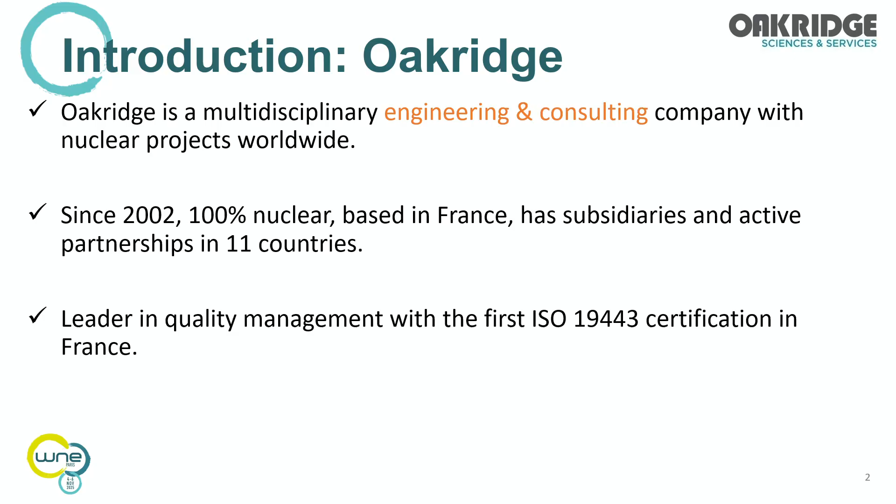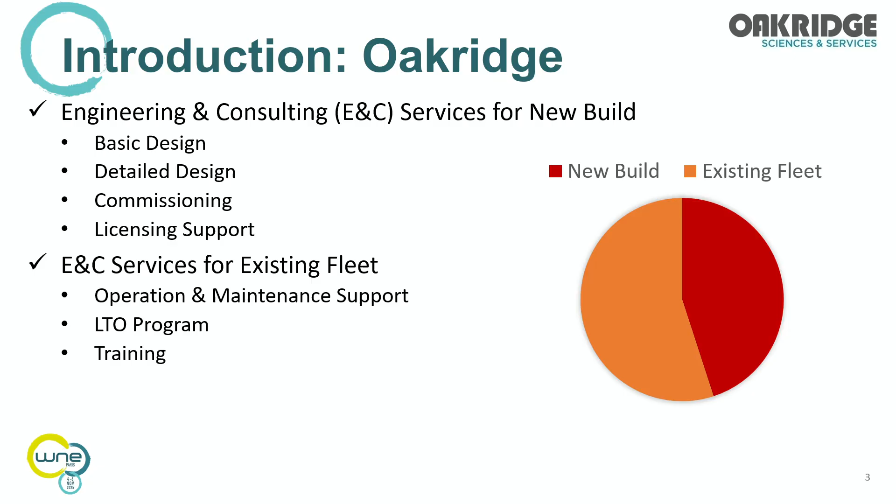Our projects are largely divided into new build and existing fleet. For new build, we do the basic design, detailed design and commissioning, and the subsequent license support to continue operation of the new build. For the existing fleet, we do O&M support, lifetime extension programs, and also training of the workforce to continue operating in a safe and efficient manner.

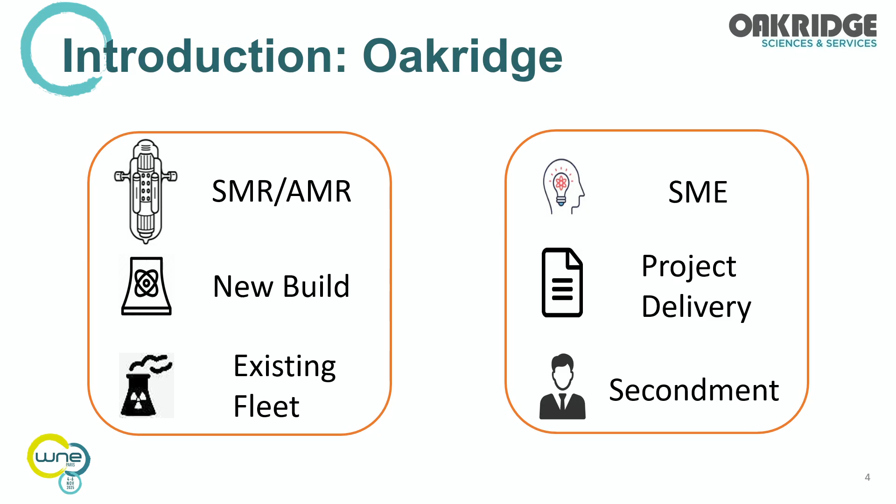When you look into the project portfolio, in new build we can separate into SMR and advanced modular reactor development. This portion came into play about 3 or 4 years ago, before I came on board to Oakridge.

This gives me an opportunity to showcase what we have done and what we'd like to do with these SMR developers across Europe and hopefully around the world.

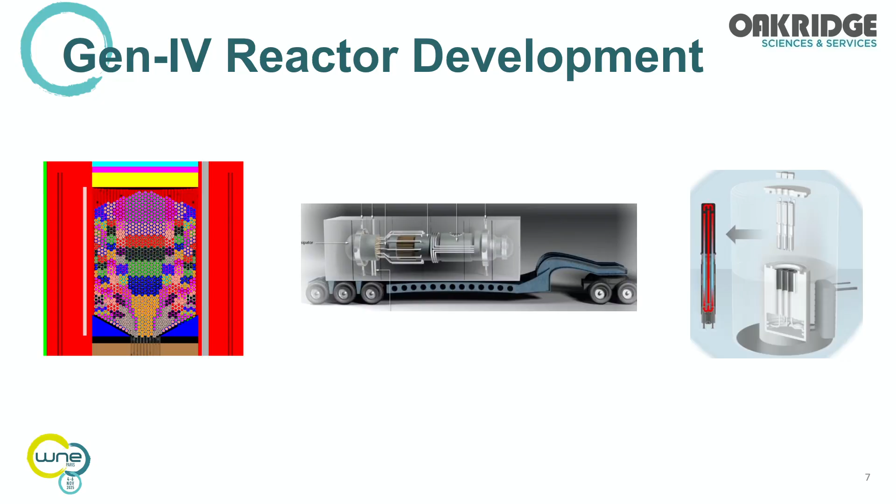We work a lot with SMR developers, but obviously I cannot use their confidential information. So for this presentation, to showcase our capability, I simulated a prototype called Oak-1, our Oakridge prototype reactor. That's a thermal molten salt reactor that is transportable in a truck bed.

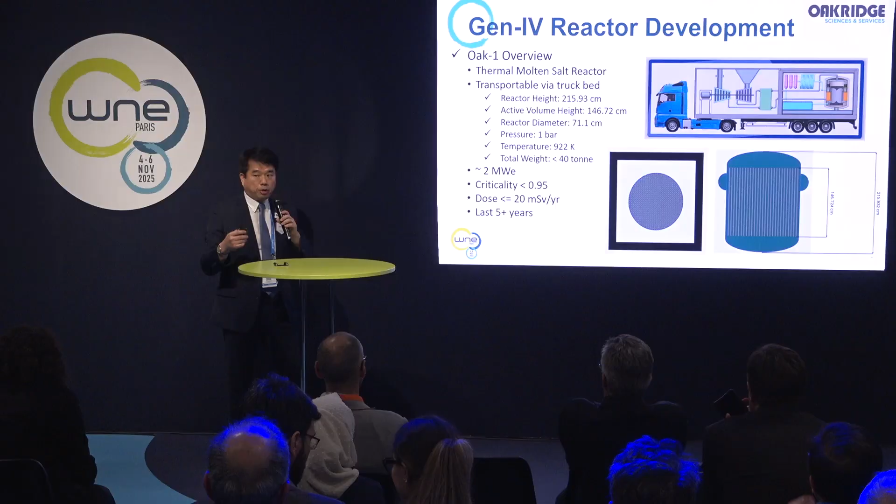The reactor is approximately 2 meters tall with an active height of about 1.5 meters. The reactor diameter is about 70 centimeters. Pressure is operating at 1 bar with molten salt reactor fuel, and temperature running at 920 Kelvin, with hopefully the total weight minimized to about 40 tons.

However, if you work with a microreactor at all, you'll realize temperature management and weight management are very critical issues. Even if you get your reactor working neutronically, you really have to get down to the weight and heat management in order for the reactor to operate properly.

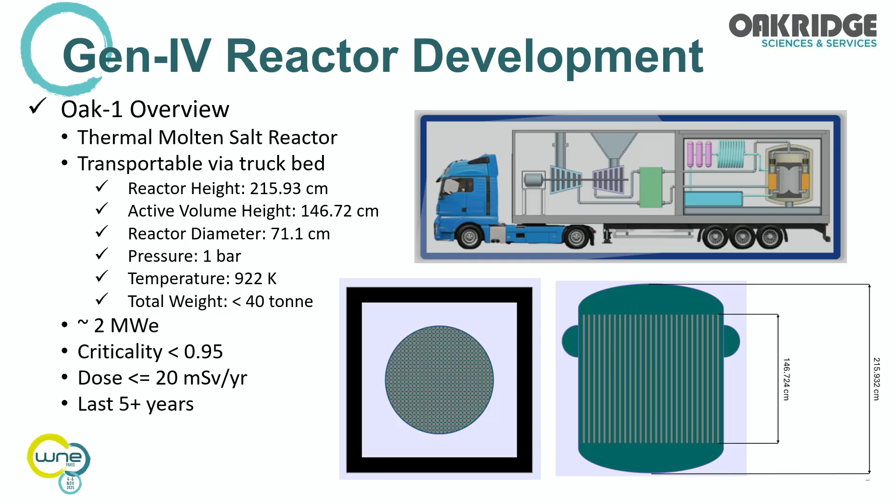So we are shooting for 2 megawatts of electricity, maintaining criticality below 0.95. Hopefully the dose during transportation will be minimized to 20 millisievert per year, and we are looking at a nuclear fuel cycle of about 5 years. That's the basic design goal we have in mind when trying to create this prototype reactor that can be on the road.

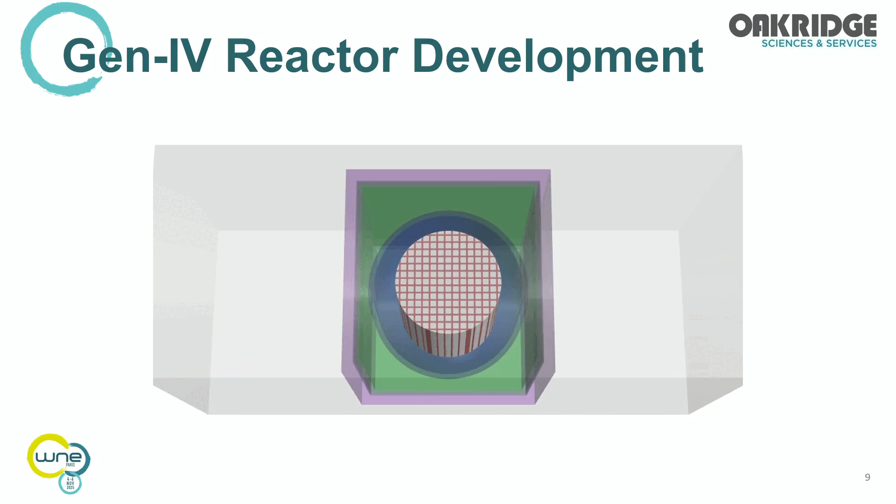So here is a rough picture, a movie of the reactor type we developed. You can imagine the inside of a container, with the core, the basic reflector, and the moderator built in there. And of course you have to have the primary loop and all the shielding and cooling materials involved. This will come out in more elaborate detail when we are done with the design.

When you use the criticality calculation, you have to think about whether to design a thermal reactor or a fast reactor. But when talking about a modular or micro reactor, you essentially negate going with a fast neutron reactor, because in terms of neutron economy, being a fast reactor wastes a lot of valuable neutrons. So you want to hold on to the fission neutrons as much as possible, and therefore you probably end up going with a thermal neutron reactor.

Because this is a molten salt reactor, you have a choice of going with the thorium cycle, and you also have to think about non-proliferation considerations.

What hasn't been done with this little exercise is the component sensitivity analysis as to reflector types and shielding materials, and the void temperature coefficient calculation and kinetic parameters will need to be verified before we are done with the basic design.

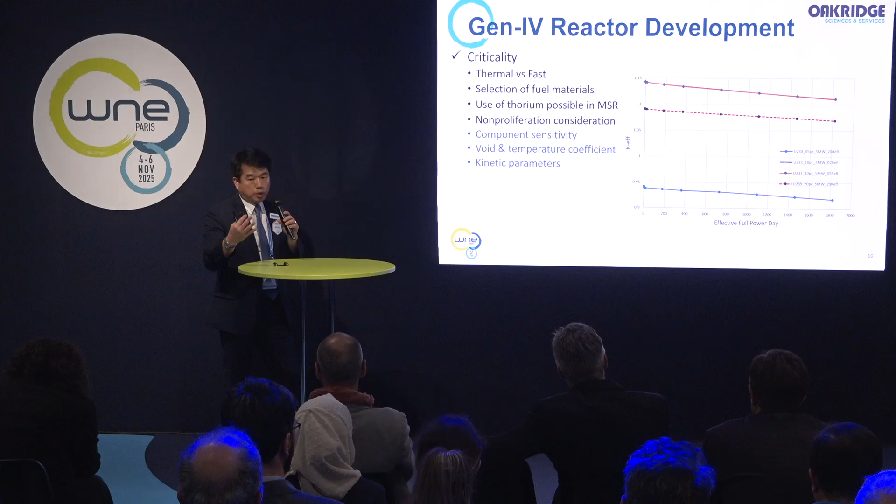The plot you see here in front of you is a combination using uranium-235 at 20% enrichment. So we are using HALEU material, or by going the thorium cycle we could use lower enriched uranium-233. Anyway, these are the considerations you can take advantage of.

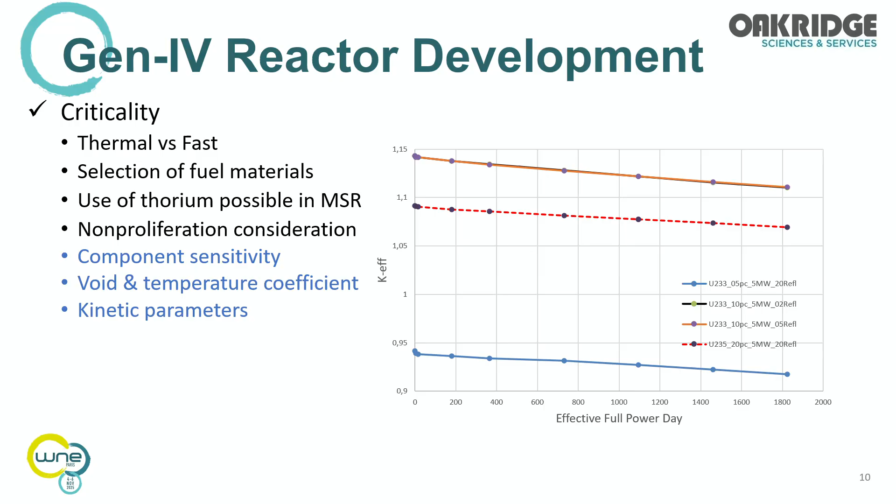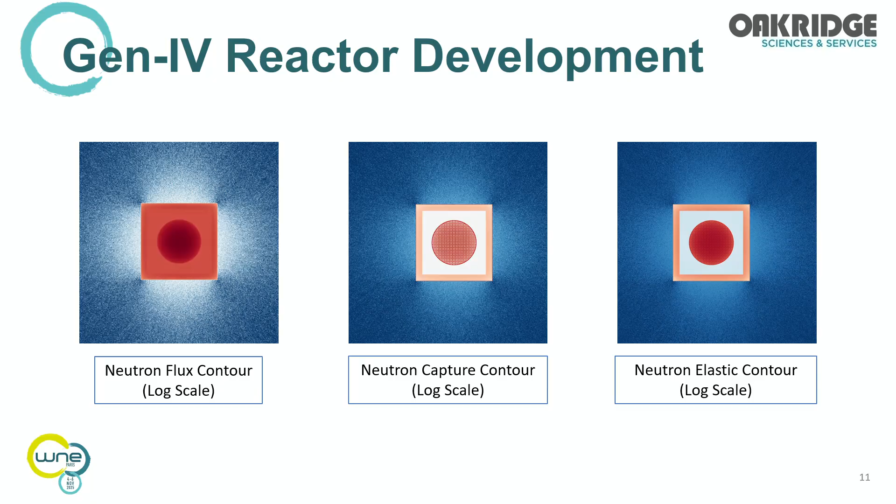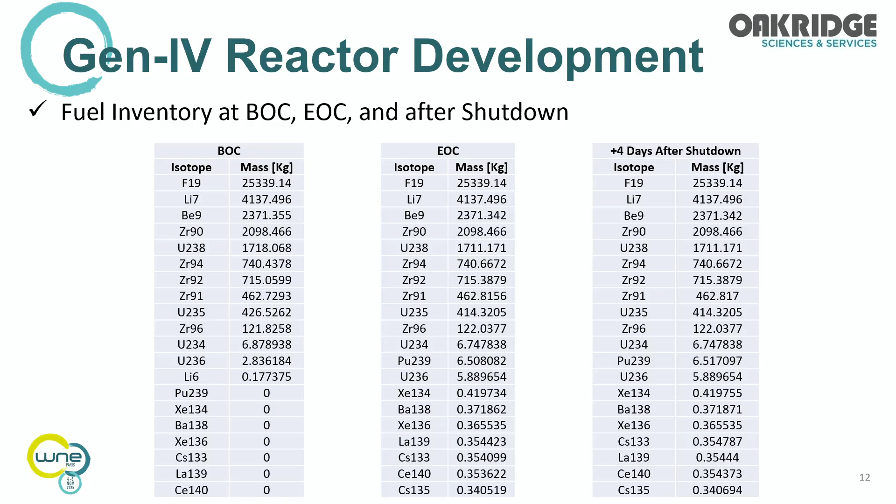We can also perform the fuel inventory from the beginning of cycle, end of cycle, and any time after shutdown. Here are the isotope inventories that we could create, and also the radioisotopic inventory after shutdown.

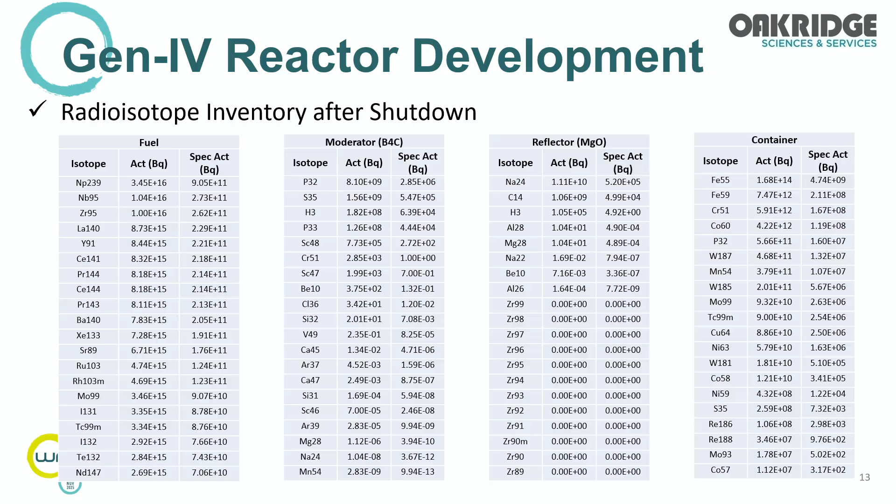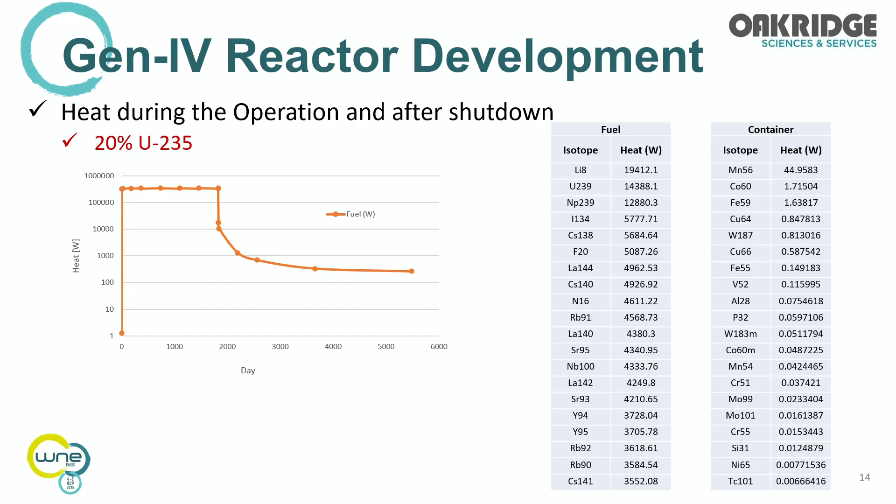You also have to think about the decay heat after operation, because when working with a microreactor, you have to be able to manage the heat and be on the road at a moment's notice. So we characterized the heat dissipation process without the cooling system, to observe how fast we could be mobile on the road with a shutdown reactor.

We are also concentrated on radiation protection calculations. We performed those calculations during operation and also during transport after shutdown. We realized that after shutdown, you don't have much neutron dose other than from spontaneous fission neutrons and also alpha-n reactions caused by the fissile materials.

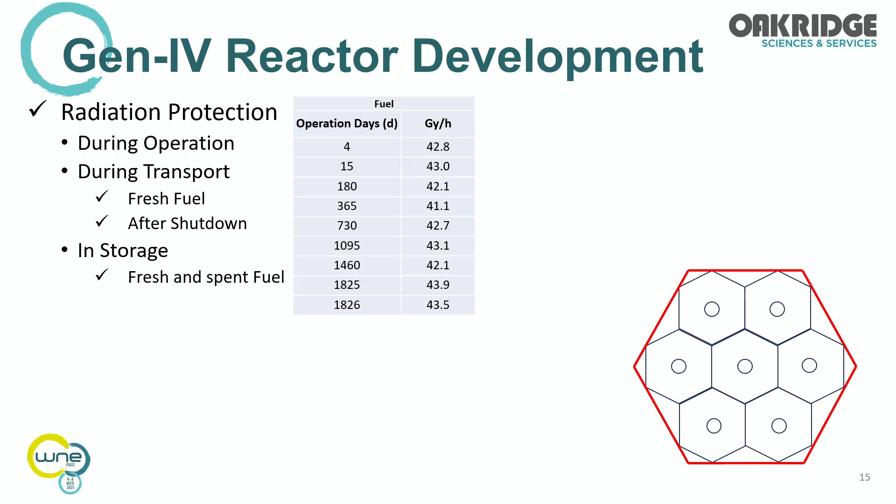We also performed calculations for fresh and spent fuel in storage to design the storage facility, as you see in this picture here. As it turned out, the hexagonal shape of the storage facility is more effective in managing the area density of the spent fuel storage.

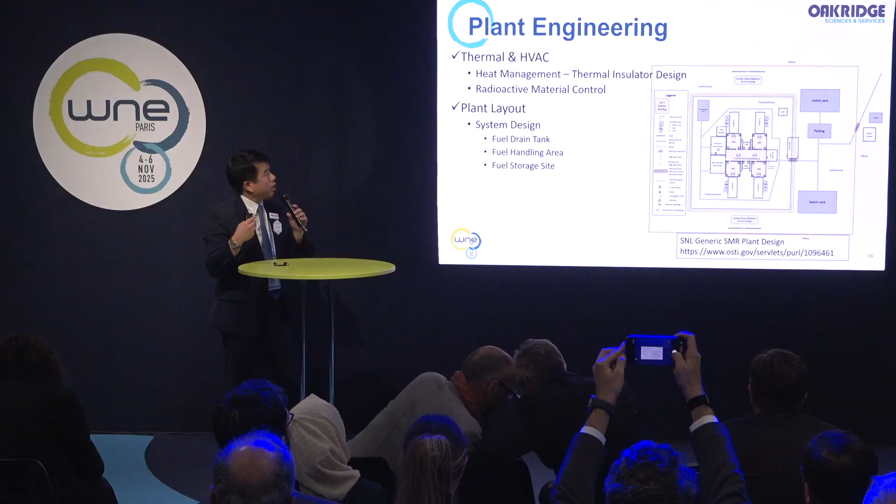Another big area we are contributing to the development is plant engineering, thermal and HVAC, and also plant layout. When you think about thermal management for regular power reactors, you have much more area to deal with, so you have a lot of flexibility in dealing with heat management. However, for microreactors, you have to manage the heat well, and thermal insulator design comes into big play. Right now the industry needs high heat resistant thermal insulator, so that's another area we could focus on.

Also the HVAC - for regular HVAC, it's just regular ventilation and flow. However, for nuclear power plants, the HVAC needs to be contamination controlled. So the HVAC comes with radioactive material control naturally.

For plant layout, we also perform - I think Aurélien will talk about this a little bit - system design, fuel drain tank, fuel handling areas, fuel storage sites. We have performed these calculations and designs to support these tasks.

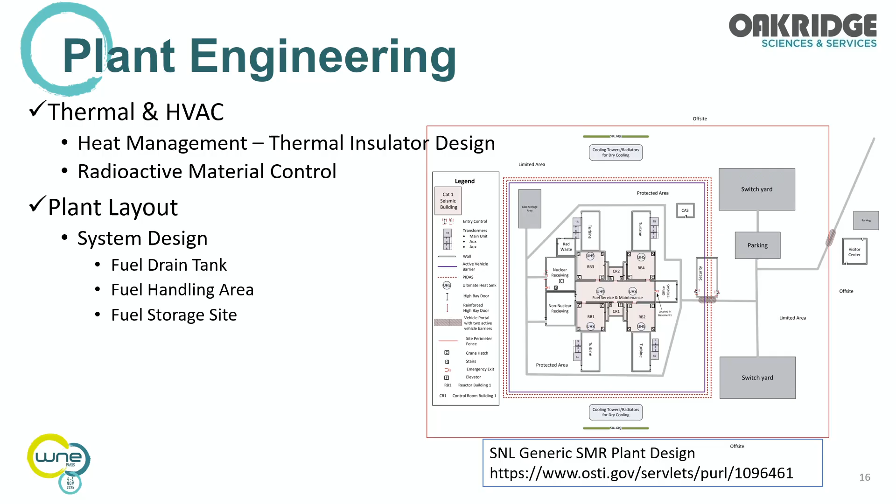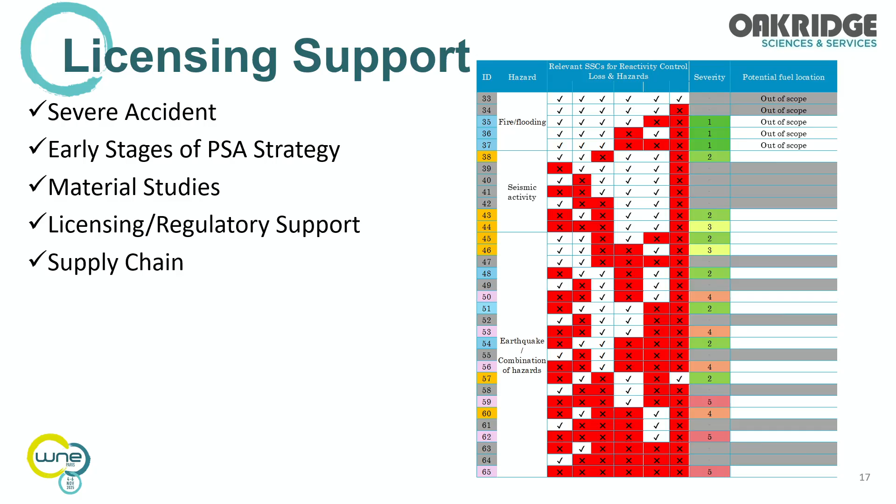What you've seen on the slide is what we actually performed for the severe accident scenario for an SMR developer. I deleted all the sensitive information such as safety equipment, functions, and consequences. But you can see that we go through every stage of failure, every possible mode of failure, and are able to come up with what could be the severe accident phenomena that could possibly occur with the preliminary design information we have.

That concludes my portion, and I give the mic to Cyrille.

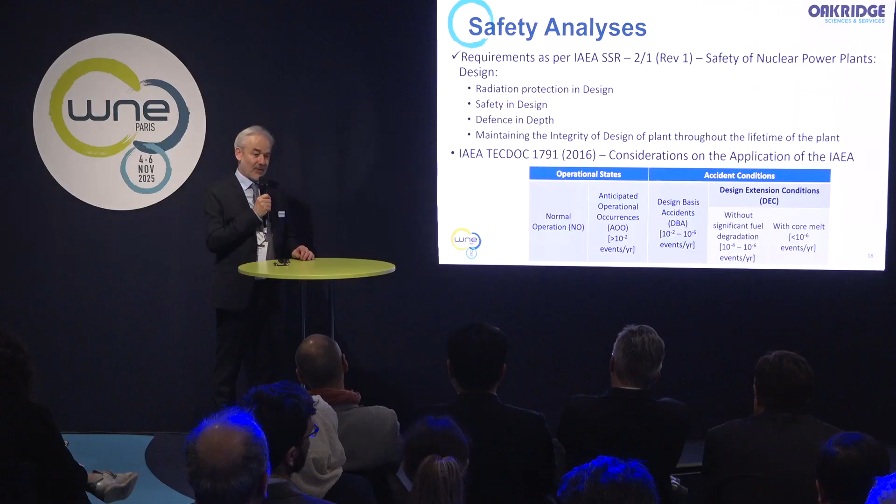Thank you so much, Dr. Chung. That was very clear, and thank you for the overview of all the things we do also for the Gen 4 reactors. And you've mentioned the role we have in early stage PSA. For this topic, I will welcome to the floor Vice President Samuel Sivault.

Thank you. Thank you, Cyrille. Thank you, Dr. Chung.

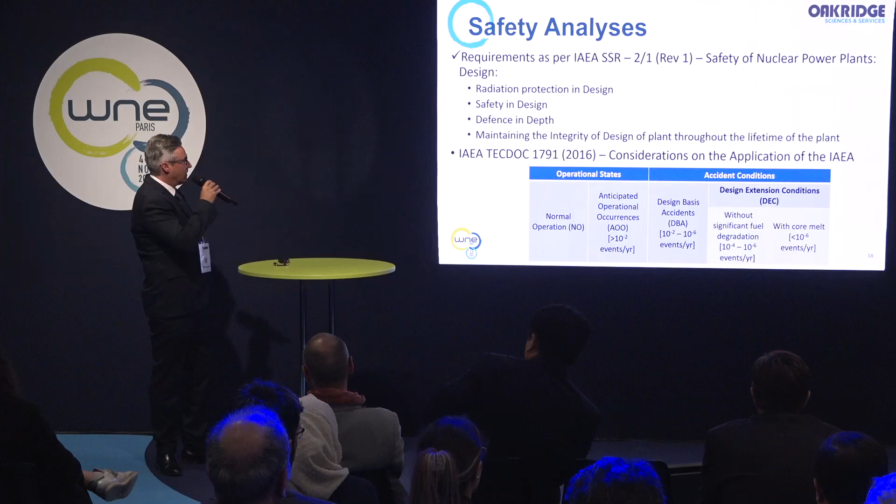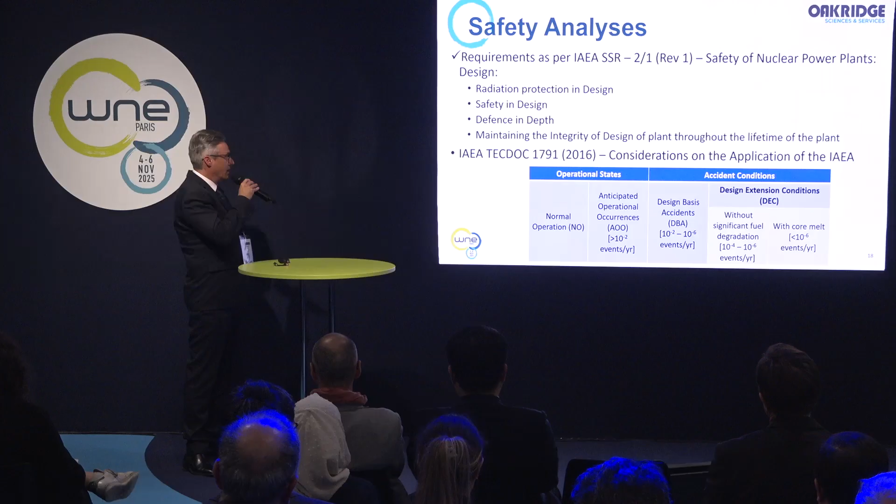I want to say a few words about nuclear safety, because all the development we do is compliant with the highest standards in terms of safety. The starting point is all the requirements from the International Atomic Energy Agency, and we are capable of doing safety demonstration and safety analysis about major topics: radiation protection in design, safety in design, defense in depth. We are capable of demonstrating that the design will be capable of maintaining the integrity of the plant through its lifetime. This is very important.

In terms of safety analysis, we are going to support microreactor development during the process of licensing with the regulator. Especially, we have very long experience analyzing the different criteria for acceptance of the design. We are going to do analysis about the transients, DBA - design basis accidents - that we define, and do the demonstration of safety and robustness of the reactor according to the different accidents we take into account.

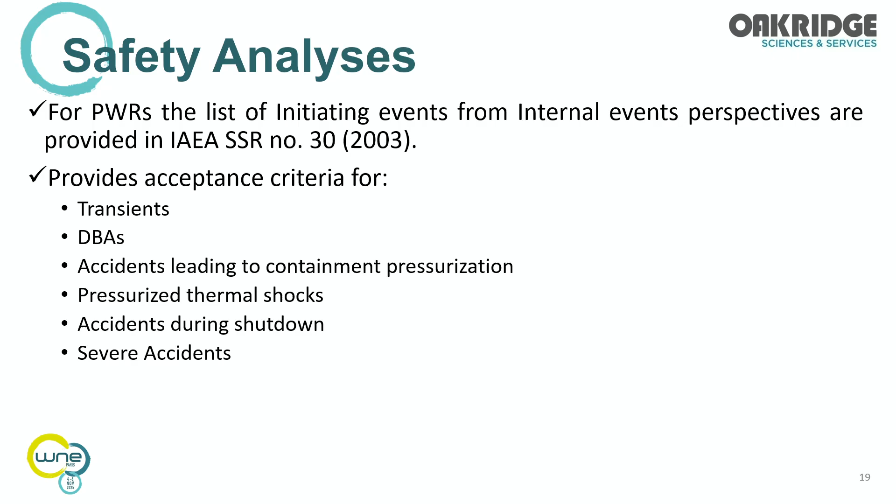We are going to study the different accidents which could lead to containment pressurization, if we have any. We analyze all the pressurized thermal shock and accidents during shutdown of the reactor. We have a special capability to do severe accident analysis - for instance, we use the US code called MAAP. This is for the deterministic demonstration of safety.

One very important thing is that in Oak Ridge, for the last 10 years I would say, we have developed probabilistic approaches. We are capable of doing probabilistic analysis during the first step of conceptual design for the microreactor. So to give you an idea about our capability on these topics...

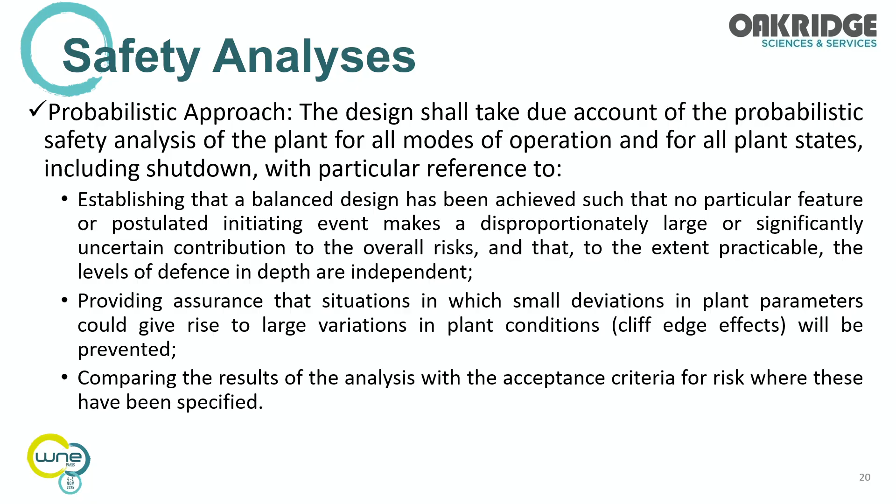We are currently involved in the lifetime extension of the Koeberg nuclear power plant in South Africa. For the safety demonstration regarding regulatory requirements, we involved a team of approximately 25 PSA analysts for 2 years to develop all the external hazards and internal hazards PSA models and quantification of the core damage frequency. About two years ago, we started taking those methods for microreactor development, and we are now capable of doing studies at the early conceptual design step, including the probabilistic approach to safety.

Thank you very much.

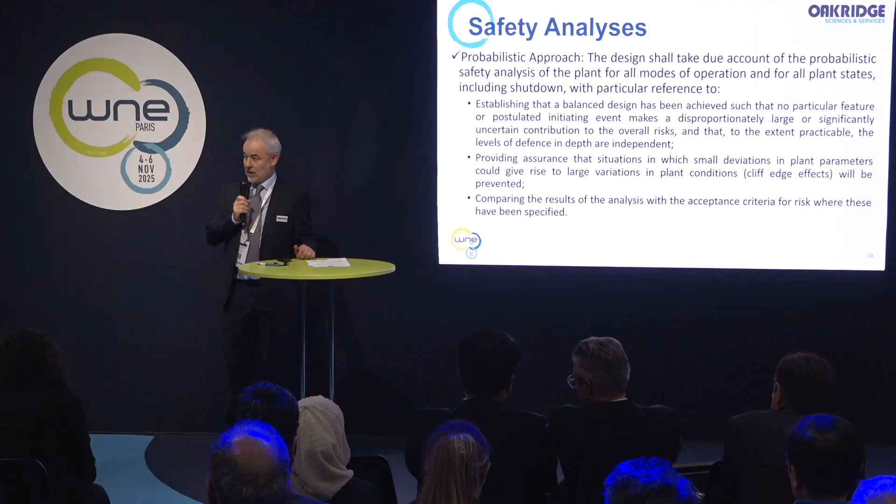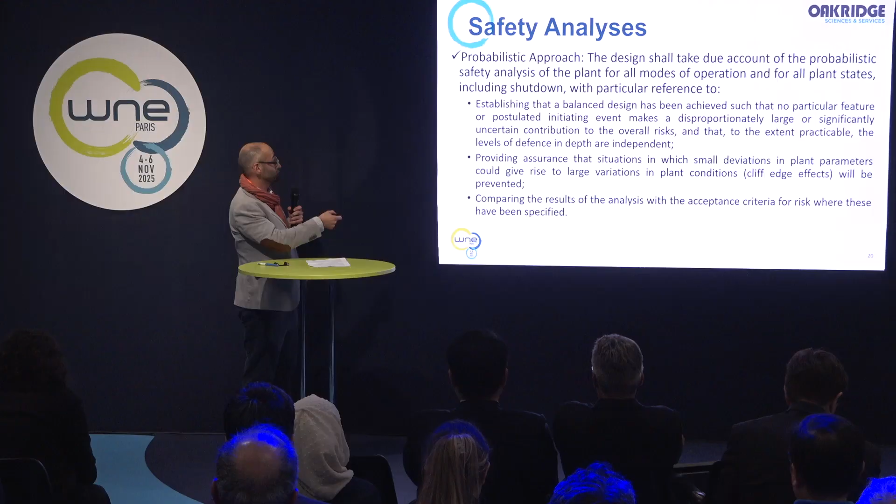Good afternoon, good evening, everyone. My name is Aurélien Ledieu. I am Naarea's owner's engineer, which means I'm the overall design authority at Naarea.

I first want to thank Cyrille and all the Oakridge Dream Team for inviting me to this roundtable. As Cyrille said, I'm not here to promote the nuclear molten salt technology, since that was already done by the previous roundtable with Nicolas, Isabelle, and Laure. So I'm here to witness how engineering and consulting companies can be partners to accelerate and secure the development of innovative companies such as Naarea.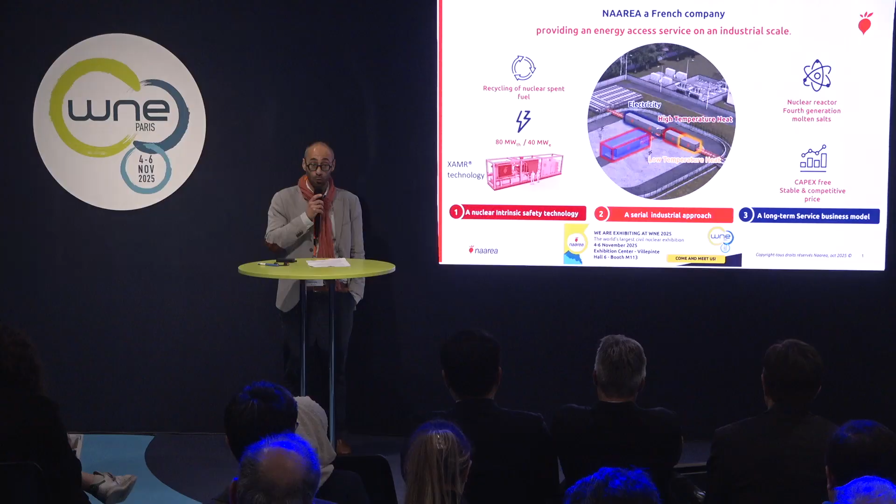First, let me introduce you briefly to the business of Naarea. Naarea was created in 2020. We are staffed with more than 200 people right now, and our business model is energy as a service—decarbonized energy, and also providing this energy from waste to energy. For that sake, we are developing an advanced modular reactor technology called XAMR technology, based on chloride molten salt technology and fast neutrons.

Thus, we simultaneously develop innovative technology relying on intrinsic safety, capability of industrialization with a modular approach settled in containers, and long-term contracts with our future customers. I'll lastly add that we target the whole chain of value from fuel closure to energy delivery, which could be thermal and electrical, as said in the previous roundtable, with a combined approach from R&D and operation and maintenance.

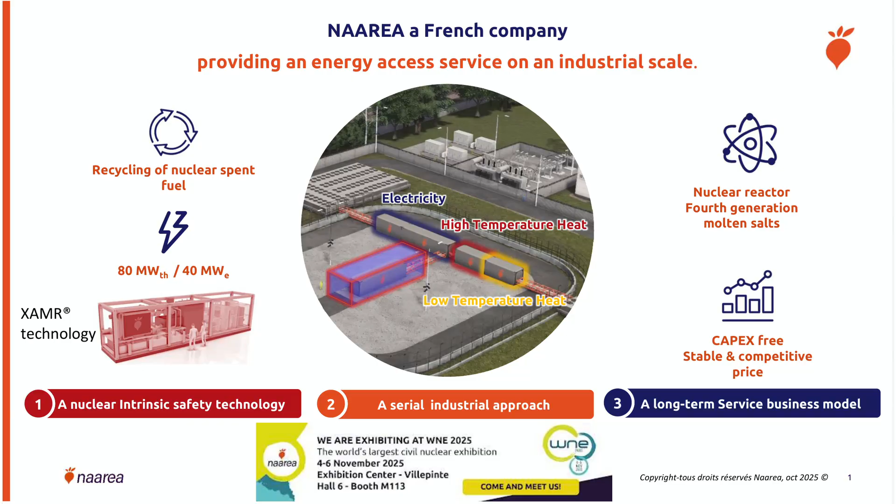Now let me show you and give testimony of how the multidisciplinary capacities of Oakridge have fastened our studies. I have chosen two illustrations of support performed in 2024—it was a selection, of course. The first is the system engineering support Oakridge provided to our

advanced conceptual design stages, to help with the design of fuel draining and decay heat removal systems. Benjamin, who was involved in these studies as a senior fluid consultant, performed preliminary functional studies and failure analysis studies, helping us find the better option in designing subsystems involved in major safety systems.

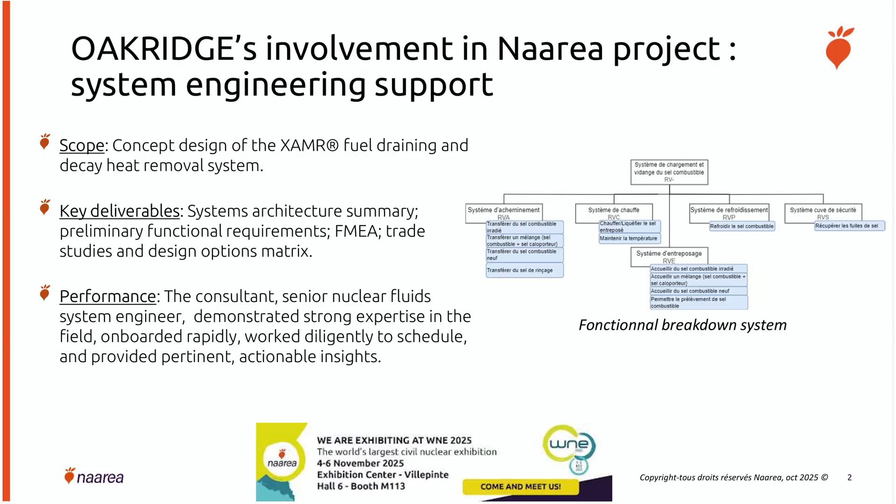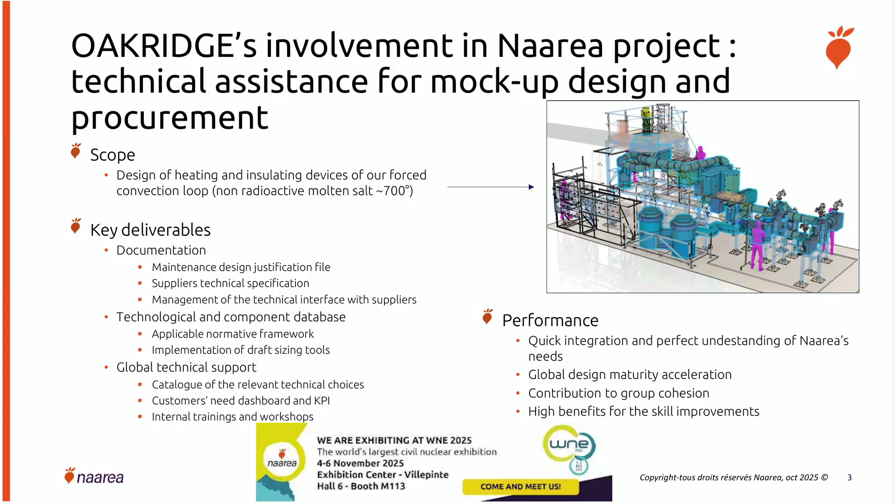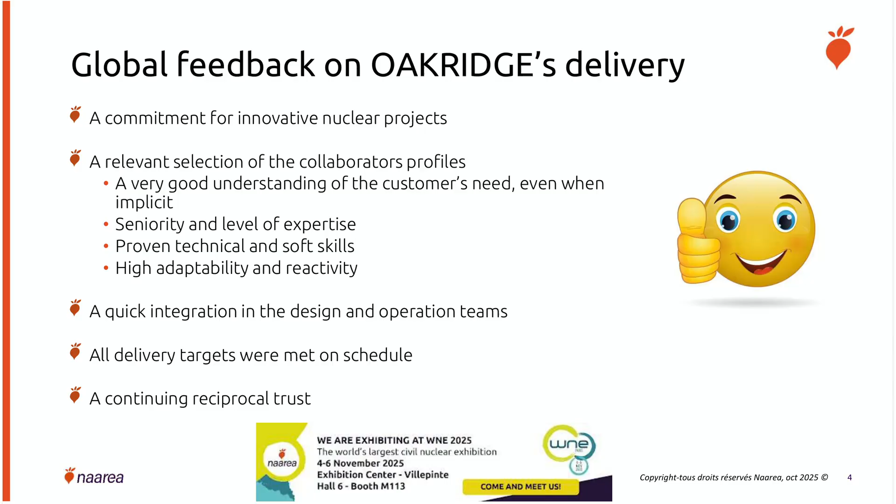As a conclusion, I would like to highlight the high reliability and adaptability of the Oakridge staff, their approach fully dedicated to project management, and understanding of startup specificity such as Naarea's. Finally, if I had only two qualities to keep in mind concerning Oakridge, it would be mutual trust and commitment for the benefit of innovative nuclear projects such as Naarea is bearing. Thanks a lot for your attention, and I'll be happy to answer any questions.